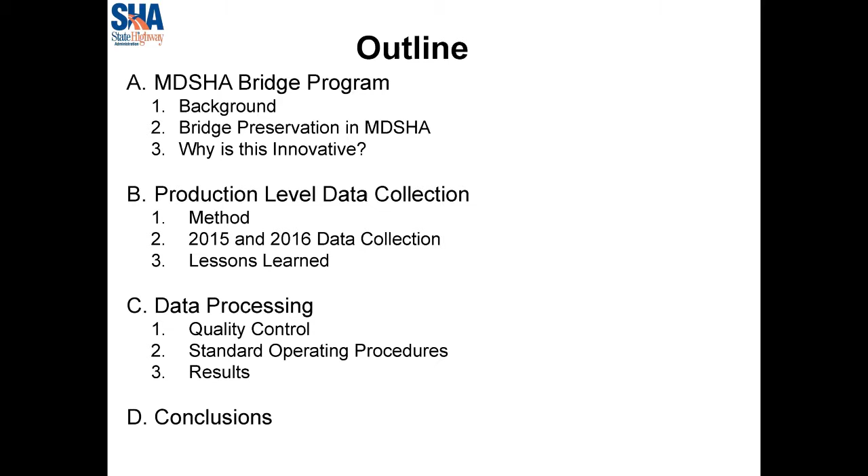It depends, okay? And then we have Nicholas Gargan with Starodub, okay? So we're going to get started. Building a GPR-based bridge deck preservation program, okay? All right, here we go. Here's the outline of the presentation that we're going to do for you this afternoon.

Okay, in the past, the methodology used in the Office of Structures was worst first. In this era of technology and data, we require methods that are efficient and repeatable. This initially started as a research project 3 years ago. We partnered with academia and the industry to determine if GPR was a viable option in Maryland State Highway Administration.

After 3 years, with outstanding results and significant recognition over the country, in 2015, our Maryland State Highway Administration was nominated as one of AASHTO's top 16 projects. And then we were actually nominated and received one of the top 4 projects in Region 1. Okay, so the results have been very positive. The way that we utilize the data and the processing methods, outstanding, okay?

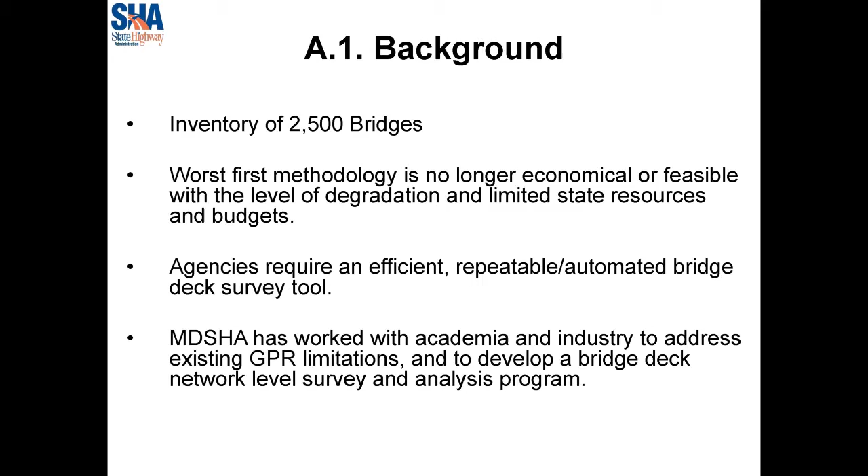Typically, the Office of Materials and Technology collects the data. The Field Exploration Division collects the data for the Office of Structures to utilize. In the past, we would collect data for approximately 30 to 40 bridges annually using the traditional methods, okay? In 2015, over an 8-week period of time, we utilized the GPR technology and scanned over 117 structures, okay? The cost was approximately between $10,000 to $15,000 per structure.

For 2016, the target goal is 250 structures over an 8-week period of time, and the cost would be reduced to $5,000 to $7,000 per structure. Right now, we're on target to meet that goal and potentially exceed it, okay? Long term, we want to implement in the bridge program approximately 300 structures per year, not only the scan, but also the processing.

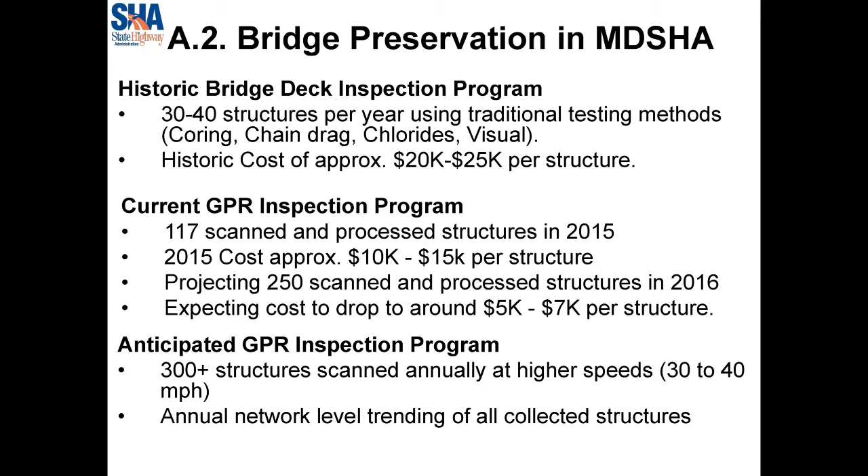Production level data collection allows us to collect a significantly large number of structures safer, faster, and cheaper, okay? And the technology is capable of reducing delays to the public, and also reducing MOT as well. Production level data processing, automated, okay?

This has kind of been the glitch with using GPR in the past, is that it would take a lot longer to process the data collected than it would to actually scan it. But with an automated pipeline, we think we've resolved that issue internally, okay? So whereas it would take one week for one structure, now we're doing 20 structures per week. When it would take 1 day for data collection, now it takes only 1 week for processing.

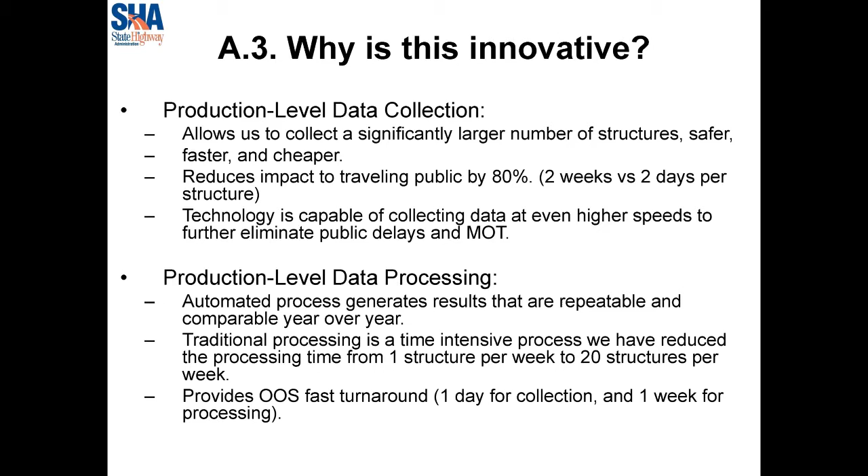Okay, and that just gives you a brief glimpse of the background of what we've done as far as the research and the history with the GPR data collection. Okay, at this time, I'd like to introduce David Hollins with Maryland Environmental Service.

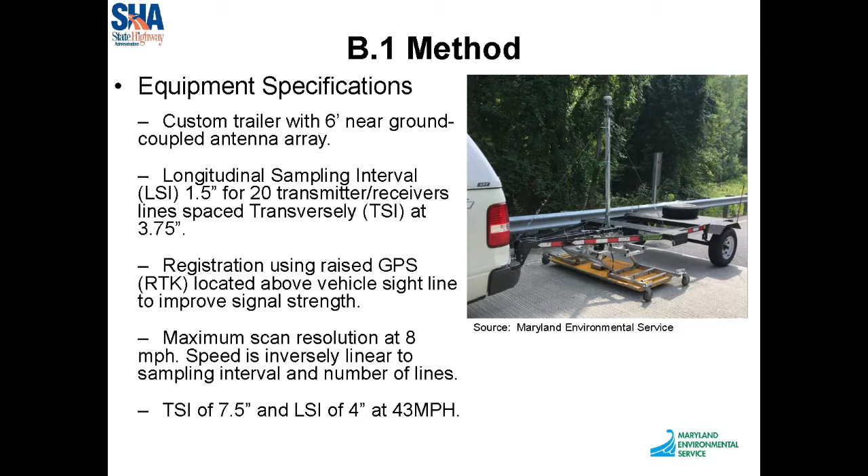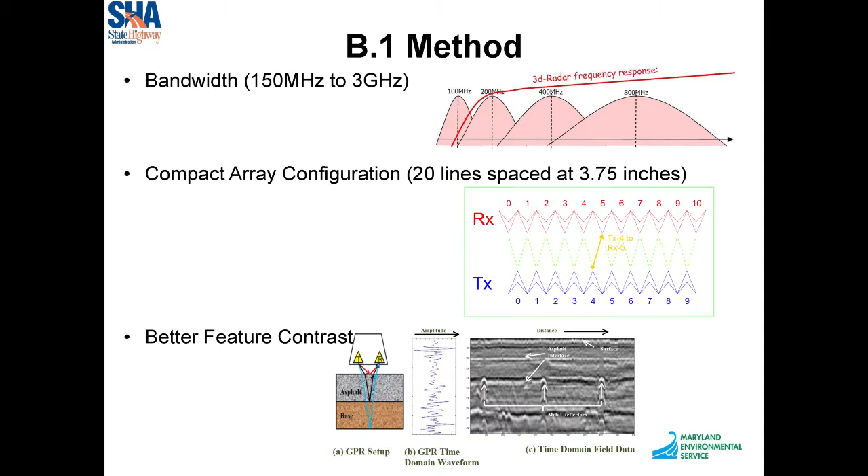GPS location mapping of scan data is accomplished using an RTK dome raised above the sightline of the work vehicle. This prevents unnecessary location distortion from the metal frame of the vehicle and the roof line of the vehicle. In addition, we're using a software package that visually shows the location of each scan pass with respect to all previous passes at that same location.

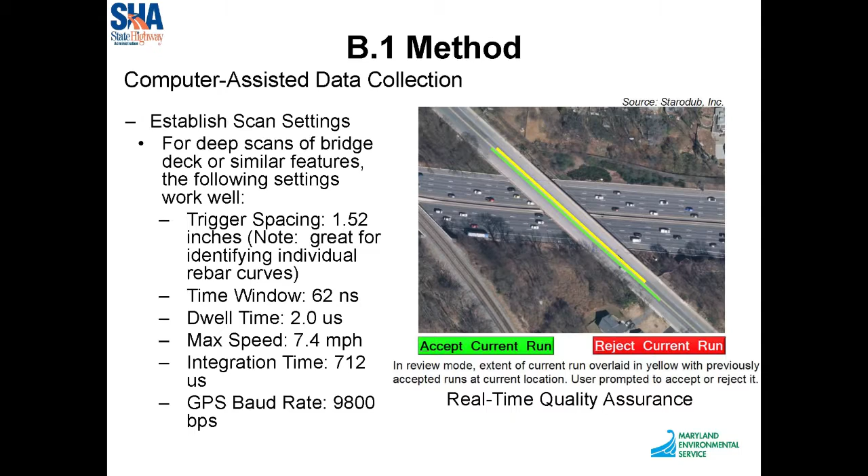Using this software, GPR collection crews can in real time accept or reject a scan pass if it does not meet minimum scan requirements such as, but not limited to, length and lane placement. Between 2015 and 2016, we have made significant improvements to our collection process. New software enhancements enable us to see scan coverage more accurately than before. This reduces repeat scans in partially completed structures, which was a problem initially.

Additional improvements focused on crew and motorist safety, which includes the use of advanced maintenance of traffic setups and lane closure permitting. At this time, with ideal conditions, we are experiencing on average a 160% increase in bridge deck scan completion during any given work shift.

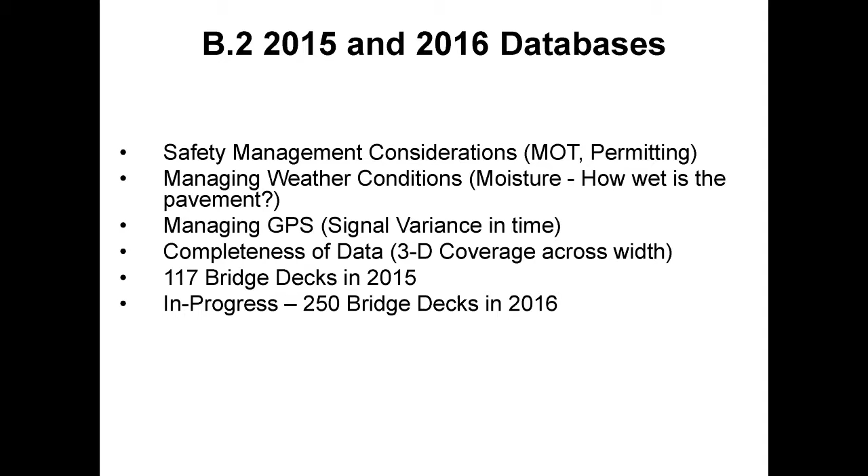Completing test runs can expose problems before they occur in the field and become difficult or impossible to fix remotely. So as part of our process, we've actually identified a control bridge that, before each shift, we will go and run a scan of to make sure that the software is working appropriately.

Problems that popped up in the past, before we did these control passes, sometimes required the crew to exit the vehicle to solve the problem. And this can put the entire crew at risk of an accident. And as we have found on this project, vehicle accidents do occur. Safety is always the number one priority, and as such, the crew should never exit the vehicle unless absolutely necessary to do so.

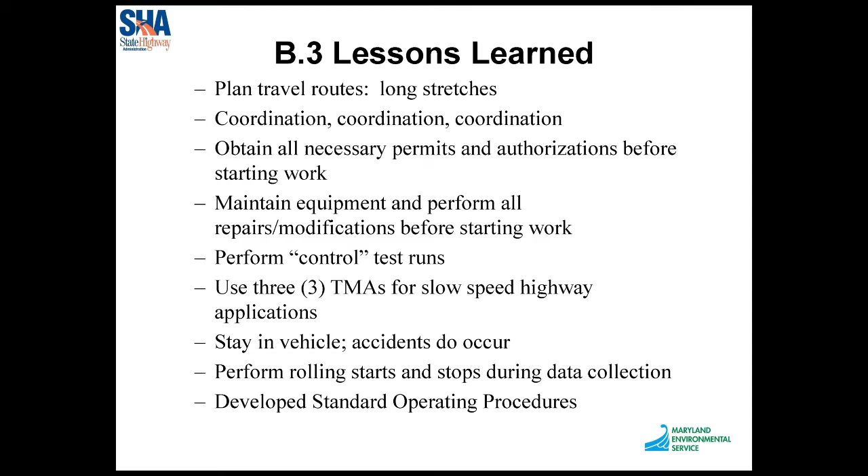Throughout this project, SHA and MES have been developing a standard operating procedure that documents our collection process. Draft SOPs are available upon request from our state highway representatives. And part of the SOP is actually data analysis, which Nicholas will share more about.

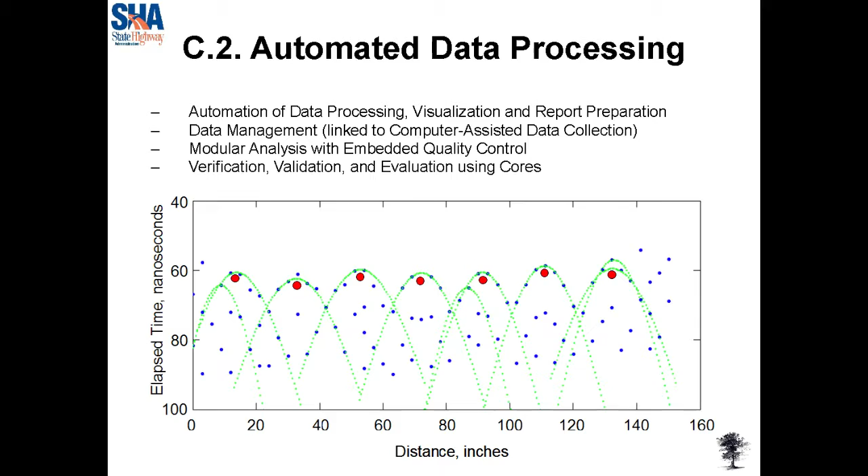Then you have the shoulders, about 2 scans, the right shoulder, then the left shoulder. So for a 4-lane highway, you're looking at about 11 scans, and that's about 500,000 automated detections of hyperbolas. So that's significant detection. So we look at the concrete surface condition, so we are able to identify any inconsistencies in the surface in terms of its material.

And if one has an overlay, one can actually separate the thickness of the overlay from the concrete cover. So you can break the cover into the concrete and the overlay. So this is a schematic that shows you that it really takes 2 steps. The first step is preparation of the project. So let's say you're given 300 structures to analyze. You prepare the general information, location, and so on.

And then you receive thousands of files. Well, the first step is to actually organize the files into a project. And then once you know that the coverage is sufficient, 80 to 90% of the surface of the bridge deck, you then go through quality control for potential external interference, and then you proceed with computing all the data elements.

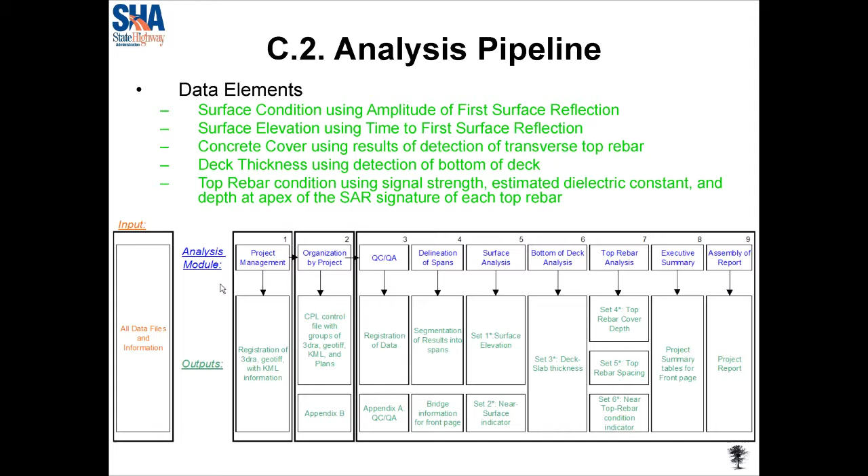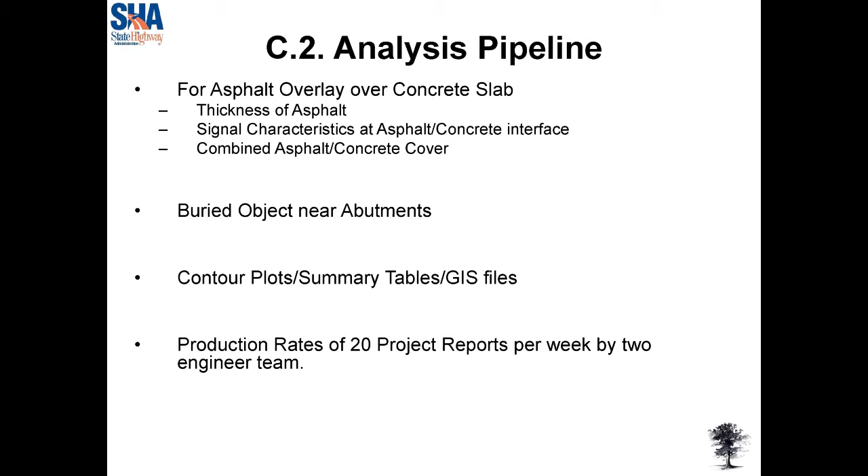So the pipeline can not only identify the basic data elements, but we are also adding special requests as needed. We can also detect utilities near the abutments if they're buried, and we provide not only contour plots and summary tables, but also GIS-ready files. As mentioned, the production rate is about 20 reports for 2 engineers per week. Most of the engineers' time is to verify that the information makes sense and meets the quality control requirements.

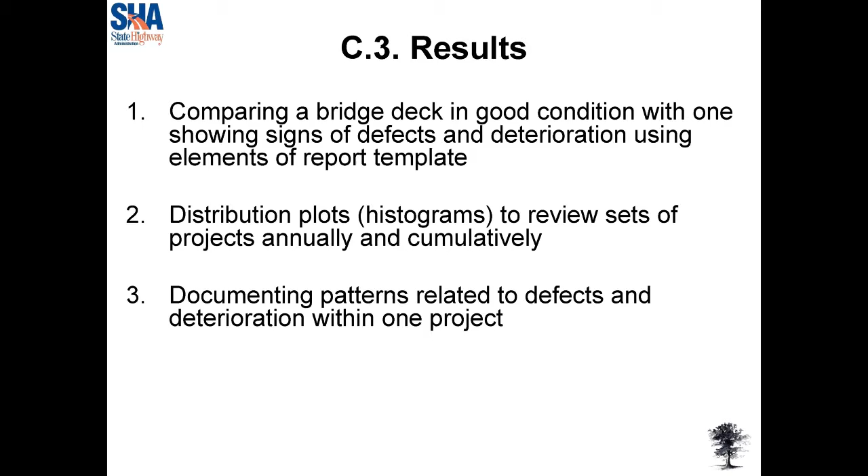So let's go over some illustrative results. Again, this is not intended to be a training course. This is just giving you a sense of what can be done. What I did here is organize in these next 4 slides 2 image views of the results provided for 4 different data elements: concrete surface condition, concrete elevation, concrete cover, and bridge deck thickness. So the top is always the first structure, the bottom is the second structure.

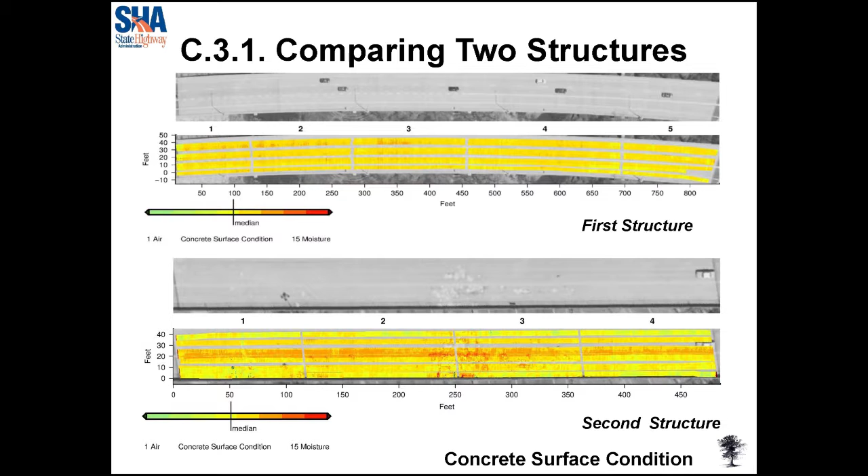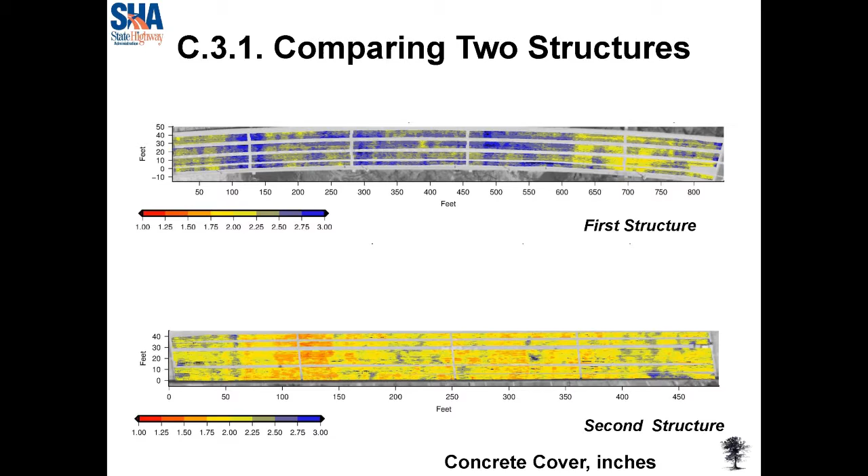Looking at concrete cover, the top structure shows clearly that it exceeds the 2 and 2.5 inch cover requirement, but still it takes an engineer to look at each plot, and imagine if you had 300 plots like this to look at, it becomes quite overwhelming. So what we ended up doing is looking per span across all the scans at a histogram of all the values for a given data element.

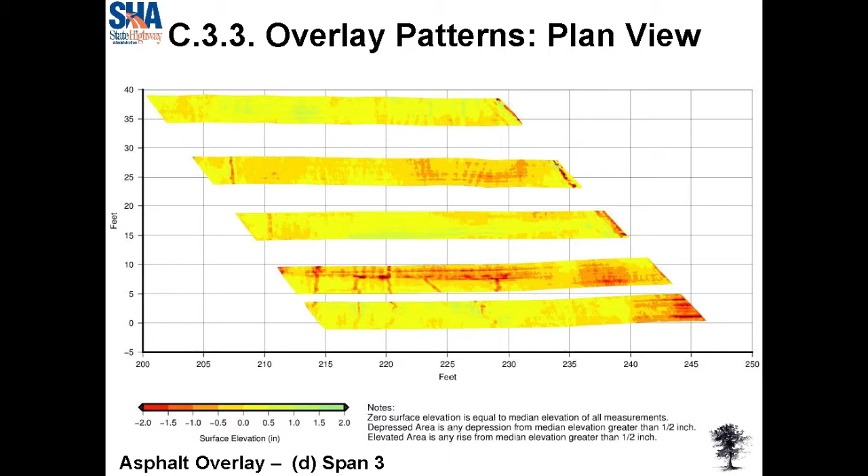Each scan is analyzed independently and then plotted together, so there's no consistency factor assigned to each analysis. So if one looks at the bottom 2 scans that were measured fairly closely to each other, one can see the continuity of the different defects developing in the overlay.

The next example shows a 2,400-foot bridge where 4 scans were taken. This is about the results of the rebar detection, and how when one does rebar detection, one gets not only a sense of how deep each rebar is, but also what the condition near the rebar is, as well as the strength of the signal. And based on that, one can then develop a sense of the condition of the rebar.

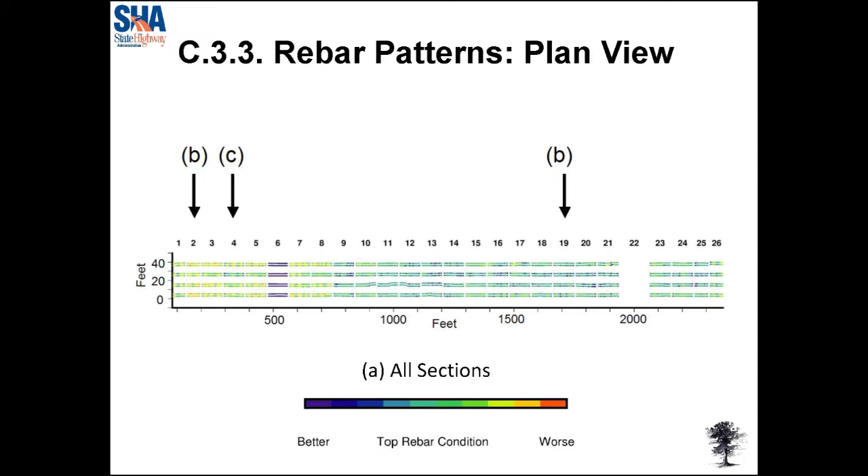So in this case, I'm going to show you, for the same bridge, which had 26 sections, 3 different sections of different condition. First is a good condition where across each of these scans there are 20 different GPR measurements. So it's a true three-dimensional measurement. So you can get your rebar spacing. The pipeline actually detects each rebar and computes the spacing between each rebar.

You can also notice that there are features in between the rebar that have different colors, and it's because they have different values in terms of what their natures are. Even though they are not rebar, I still plot them to show you that there are things going on around the rebar. So this is an acceptable condition.

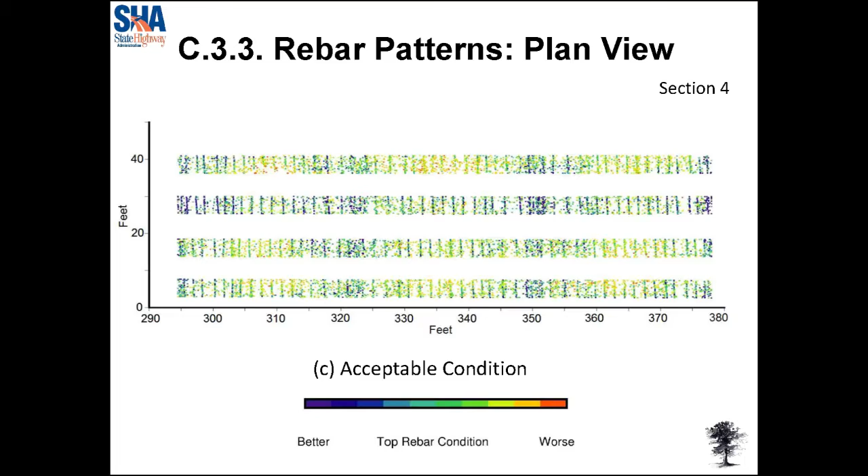So in short, data collection and data processing are now linked together, and it's pretty much automated. The quality control aspects are quite significant, and they must be automated also. In terms of the overall processing times, for a typical highway structure, it takes about 8 to 12 hours of actual processing time. The rest is about verifying the results are correct. The reports are automatically generated and then assembled at the final stage of quality control.

If you care to have more technical information, please do not hesitate to ask. But I hope this gives you a sense of how much has been automated and how much is generated. Thank you very much.

Okay, so I'm actually here to close. Over the past 3 years, we have been working to develop a successful GPR-based bridge deck preservation program, and over that time, we have been awarded AASHTO's Sweet 16, and we have actually seen this project start to transition from research into potentially becoming part of our program. And we have started to produce results that are GIS based and that can actually be trended over time.